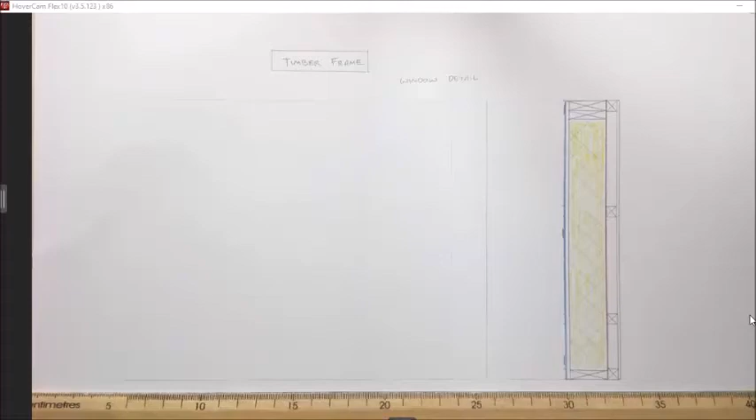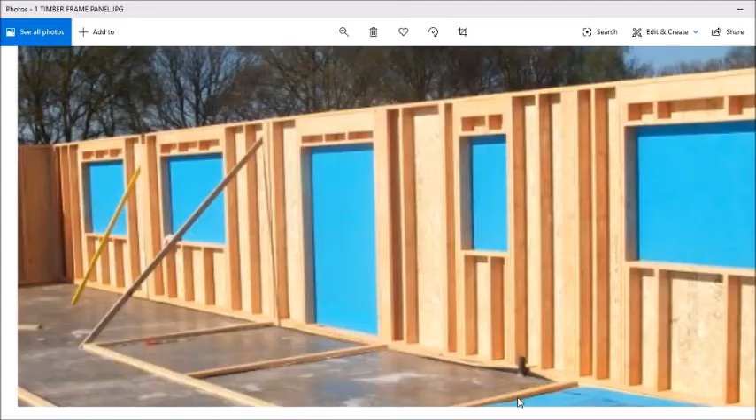Getting on to the window detail now. We need to chop an opening out of the timber frame panel. So we've got the basic outline of the timber frame panel here, again 200mm thick. The main thing you'll notice when you look at the timber frame panel is above either an opening for a door or a window, you have a section of solid timber, and it's the full width of the panel.

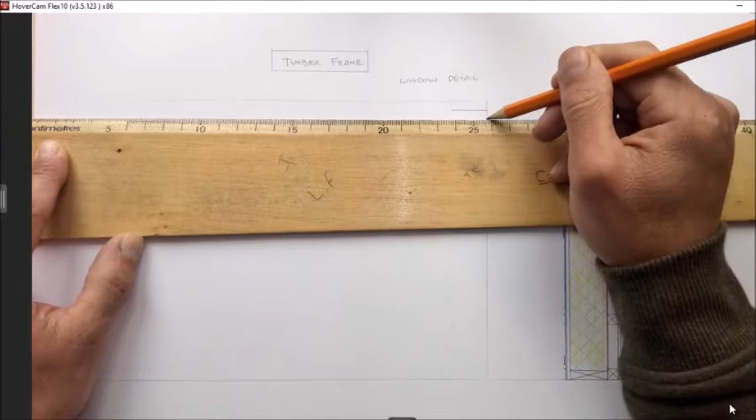To draw that in is very straightforward. We just need the same as we had before, our head plate. You can draw a double head plate if you want, and seeing as I've got it in the first drawing, I'll keep it. You don't have to have the double head plate. So that stays standard.

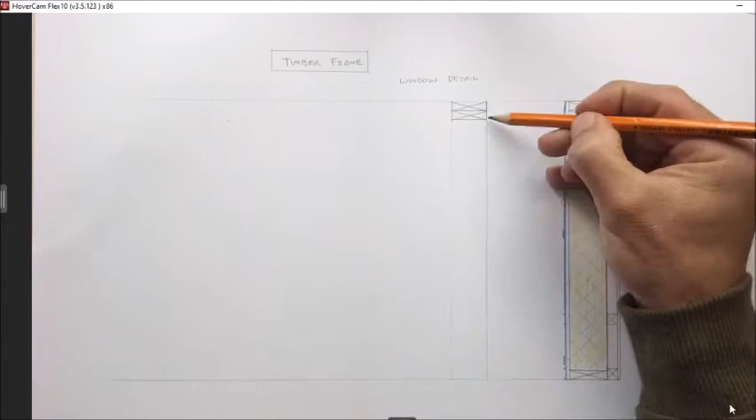Underneath that then we need our lintel. In timber frame, the panel is all timber. The lintel is going to be the same height as whatever you were told was this dimension here. So we were told at the start of this one, for example, I drew it in 200mm wide, meaning my lintel is going to be 200mm high. So that measurement is the same. If you were told that that panel was going to be 250mm wide, you'd make the lintel 250mm high.

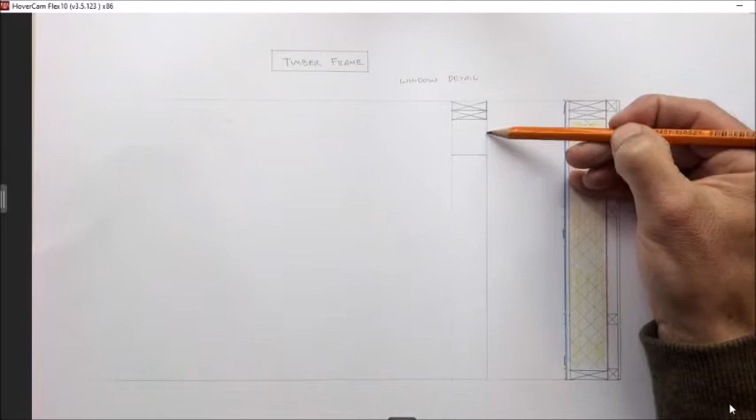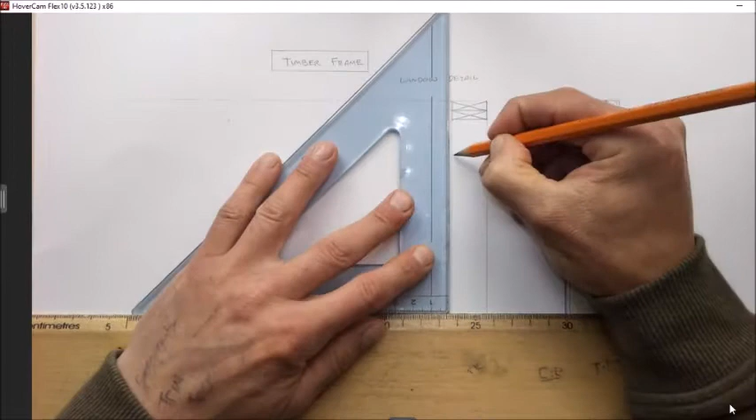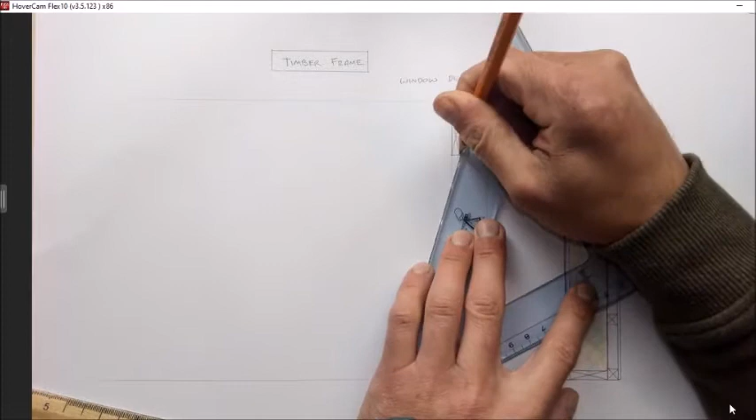All the timber is 50mm, meaning I have to make this out of 50mm pieces of timber. So it's going to be 50, 50, 50 and 50. So 4 pieces of timber are going to go into it to fill it up. And that is my timber lintel. And it can go in right under the head plate. You don't need a gap between the two. So I have my timber lintel drawn in.

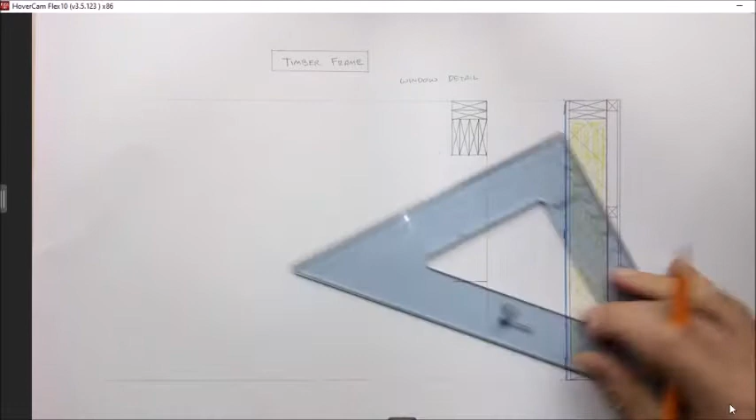The opening for the window, doesn't matter where we put it, we'll drop it in down here. It doesn't really take any weight, so it's just a single 50mm piece of timber. All the timber is the same size in any of the panels. So at the start of this drawing, I specified that all the timber was going to be 250 by 50. So don't move away from those measurements. Window opening is in.

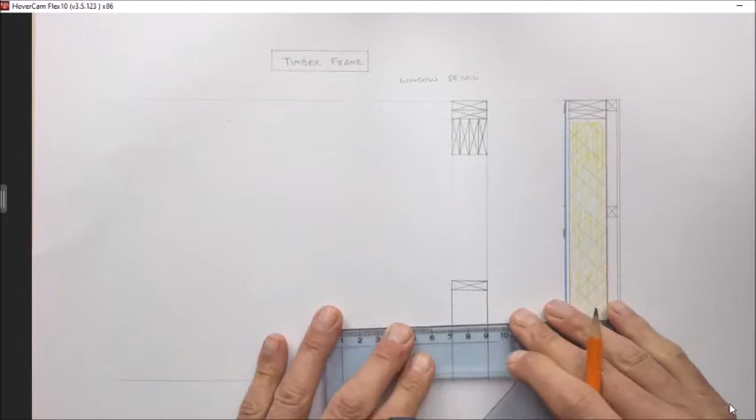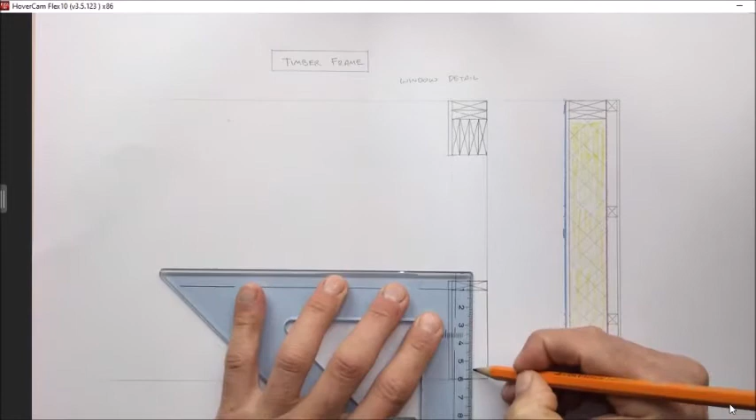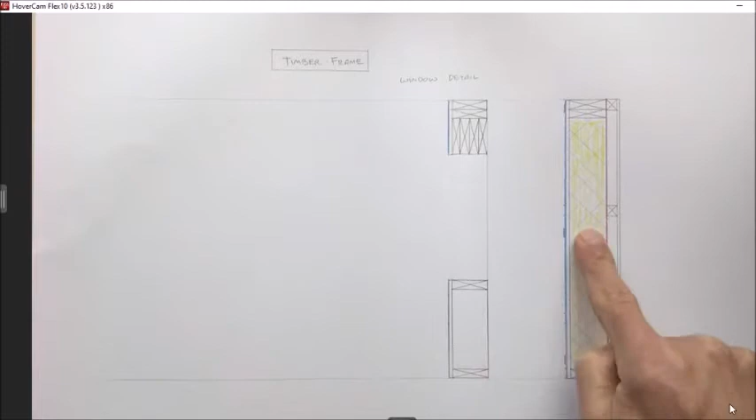And again, all the bits of the panel are the same. Plywood, 18mm thick. So the basic parts of the panel are the same. There's our plywood. Sorry, I forgot the sole plate. And our breather membrane. Blue for the breather membrane on the outside. So basically we just took the same panel from here and just chopped the window out of it.

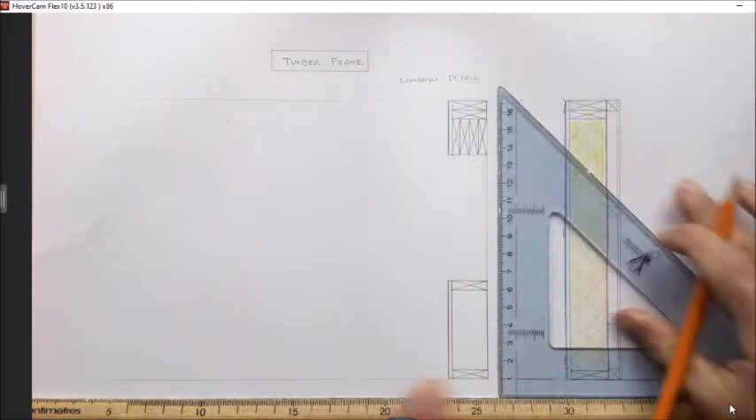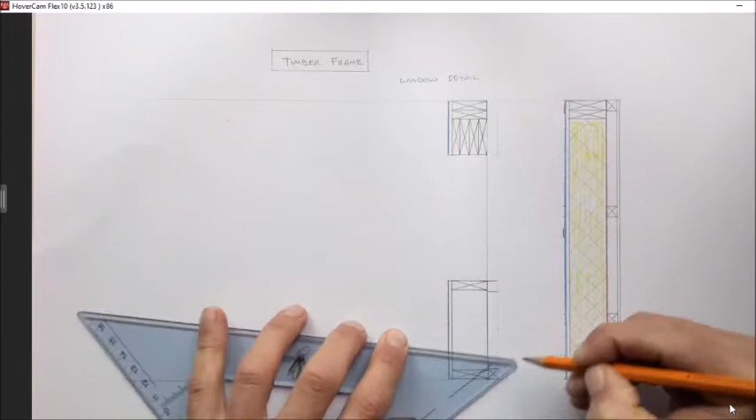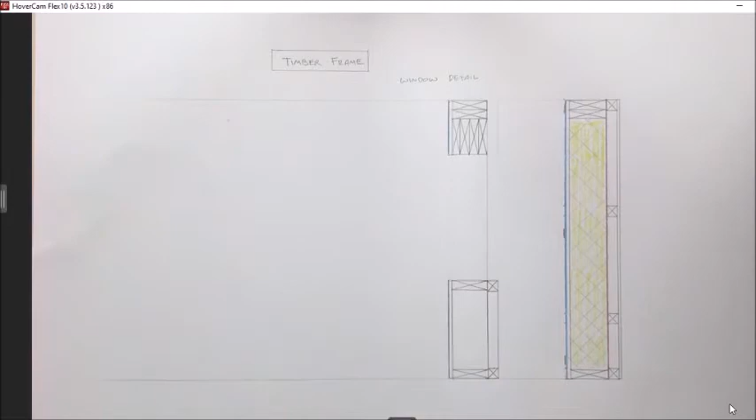Again, the airtight membrane, the service cavity and the plasterboard is the exact same. So the same thing, for example, a 60mm service cavity in 6mm. And I'll have a batten right at the bottom and right at the window opening. So 6 again, I said it'd be 6 by 6. So that is the first part of the service cavity drawing. The top for the second part, and again 6 and 6.

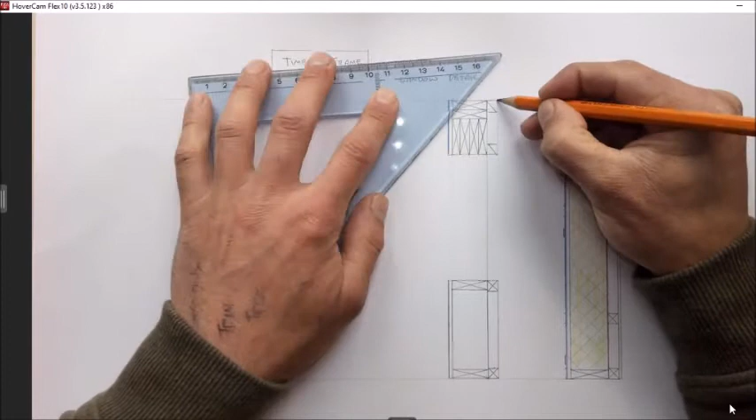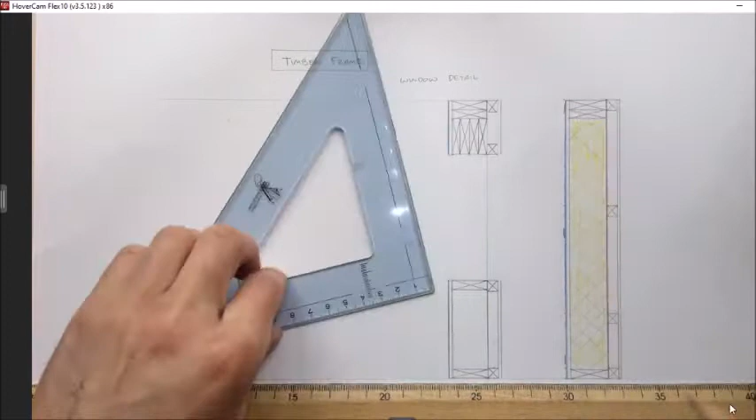And that is our service cavity created on the inside. 12mm plasterboard then as always. So we'll have our plasterboard coming up. And it'll turn in later on when we draw the actual window itself.

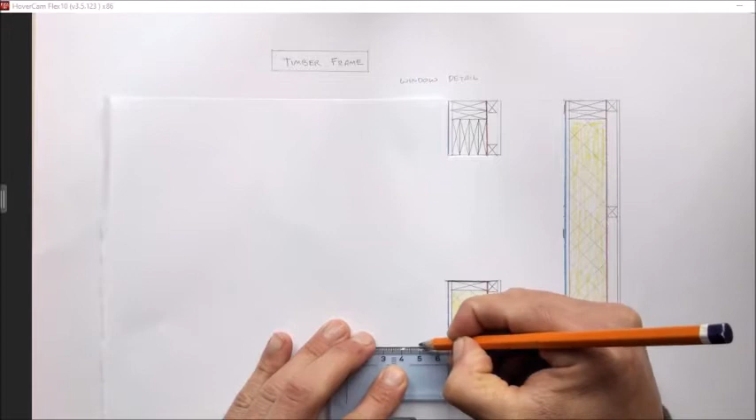For a block outer leaf then, same as before, it's very straightforward. 60mm cavity, and the block wall itself is 100mm. So lightly draw those in.

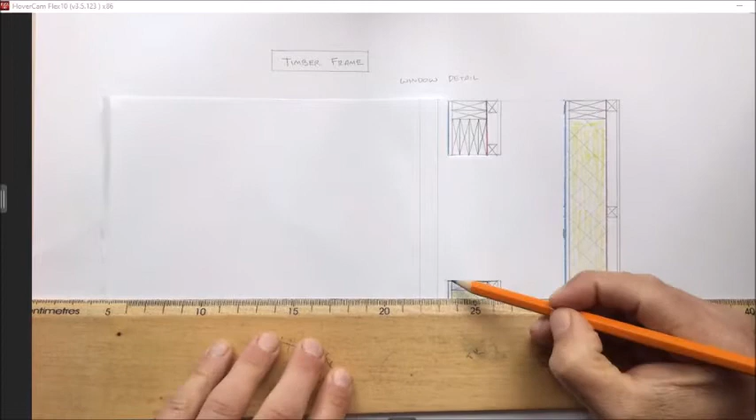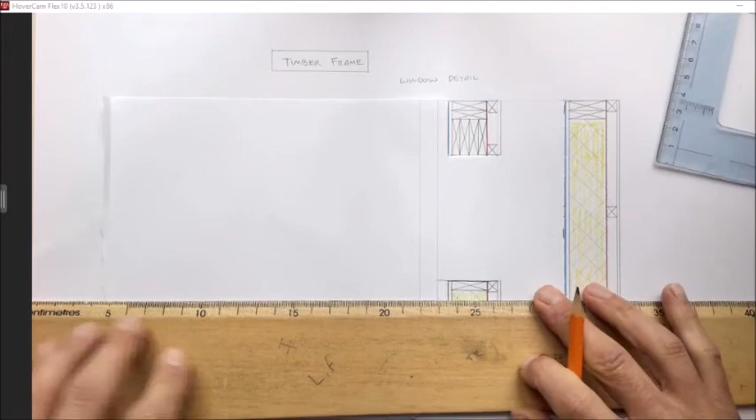Our windowsill has to be dropped in. So our sill needs to finish with the top of the timber frame section for the window. So when we come along, the only dimension you need is it's 100mm high, so 10cm high. So slight overhang out over the blockwork, drip groove so that no water passes back in underneath it. We'll have a slight angle.

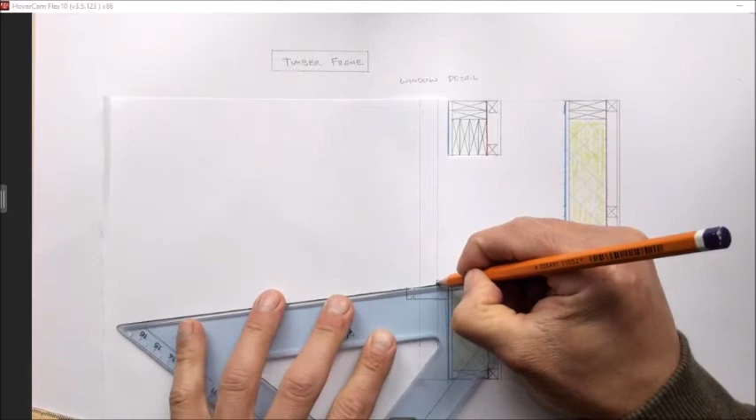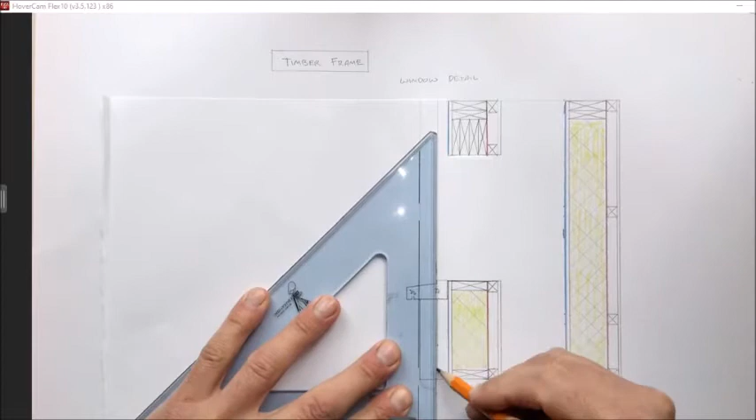Made with concrete, so show your labels for it. And there we have our sill put in. Blockwork down from there. As with the ordinary wall detail, you need your DPC. The DPC is wrapped up the back of the sill.

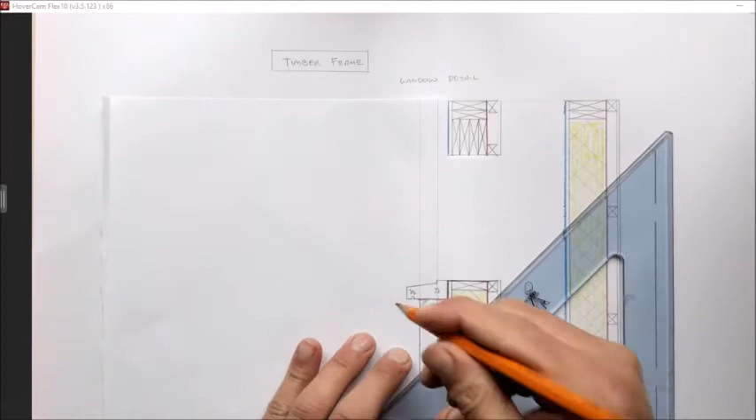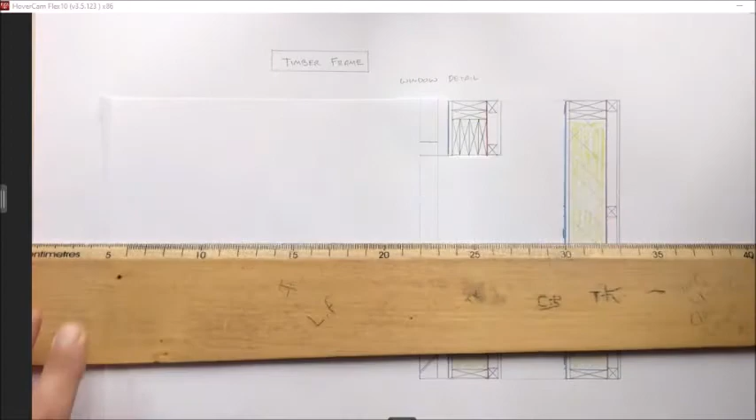So this detail I'm drawing is exactly the same for a block wall. So you're pretty much just copying the outer leaf of a block wall for this drawing. Same up top then, we need a concrete lintel. Lintel always 75mm, 7.5 on the drawing. And our blockwork will continue up from there.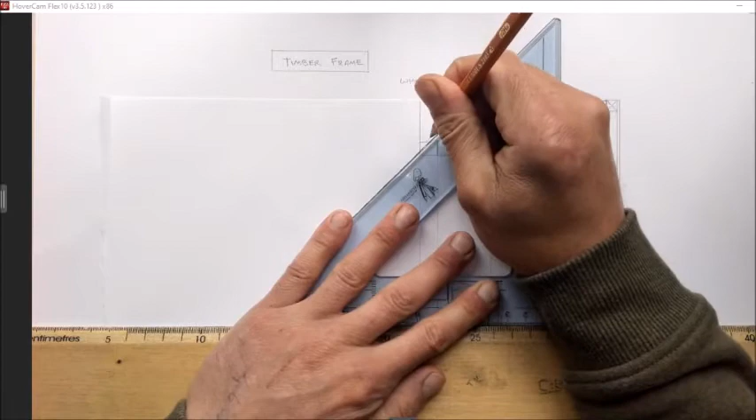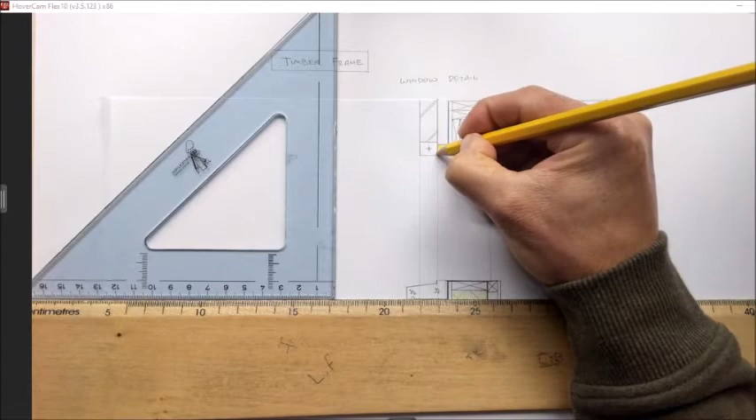Steel in the lintel, and as always we need a cavity closer. Cavity closer, no dimensions for it. Drawn in, and it's always filled with insulation. Cavity closer underneath the sill as well. And again filled with insulation.

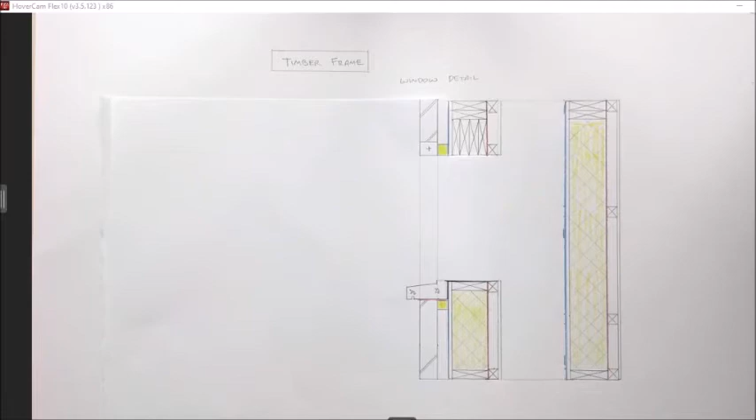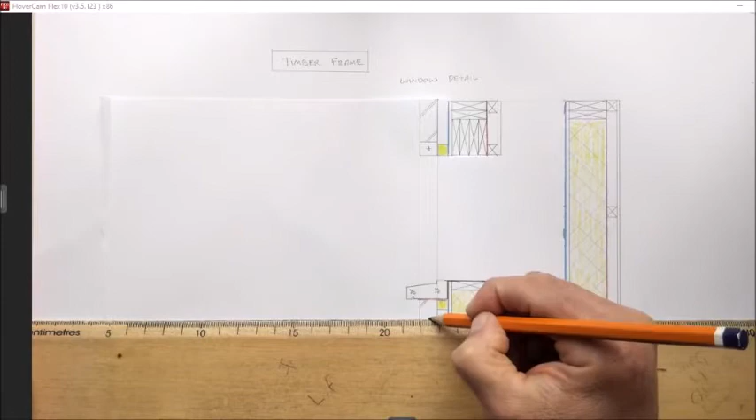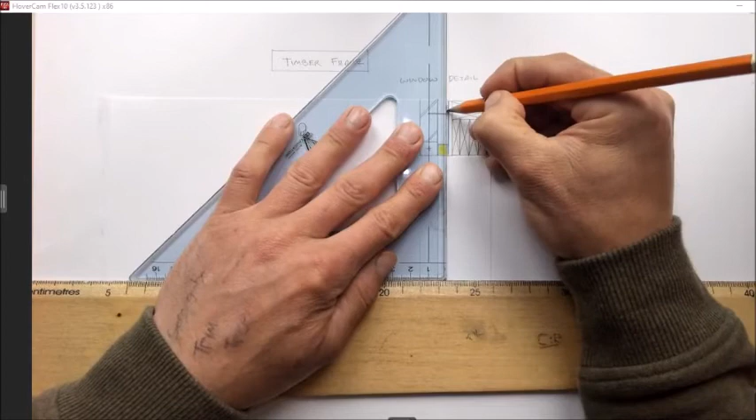We need our wall ties, so you'll draw in a couple of wall ties as we did before. And again turned up onto the timber frame. It's built into the blockwork and screwed onto the timber frame. So one up top, same. And again, in keeping with our standard block outer leaf, we have a step DPC.

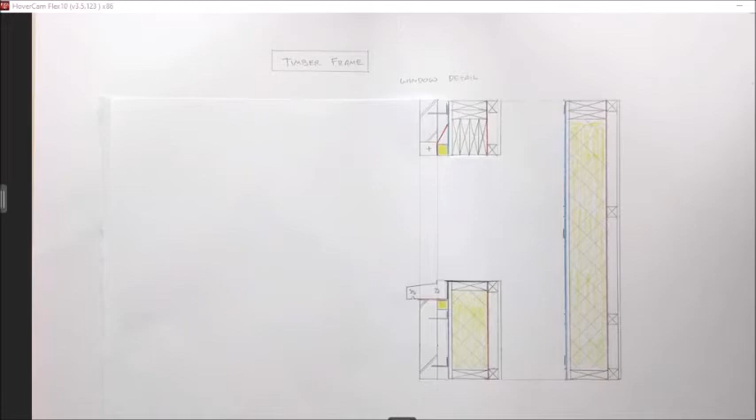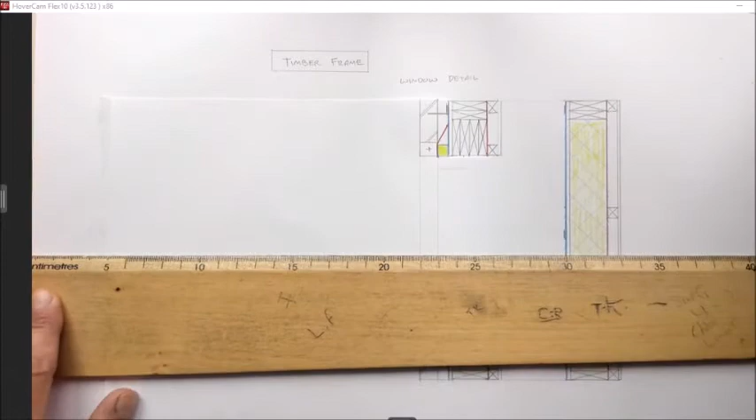The window, they'll normally specify a size for it. If they say it's a timber frame window, triple glazed, maybe with 150 by 75mm frame, what that means is from the inner part of the lintel, it'll be 150mm wide, 75 high. So you start off with a little box that size. We always start at the top and we work down to the bottom of the window. So that's the start off of the frame.

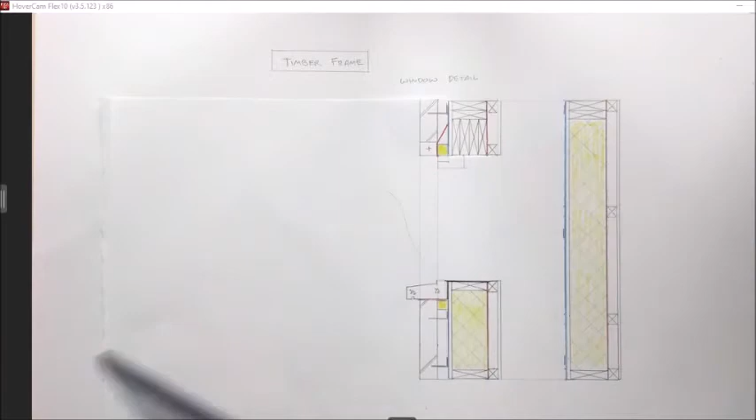I need to cut the sash out of it. Sash is usually about 60 millimeters. So in other words, we just measure in 6. It doesn't matter what height you come up there to cut it out. And there's no dimensions for the size of the sash, so the frame of the window. So I'm drawing in the frame of the window. And I'll draw in the triple glazing coming down.

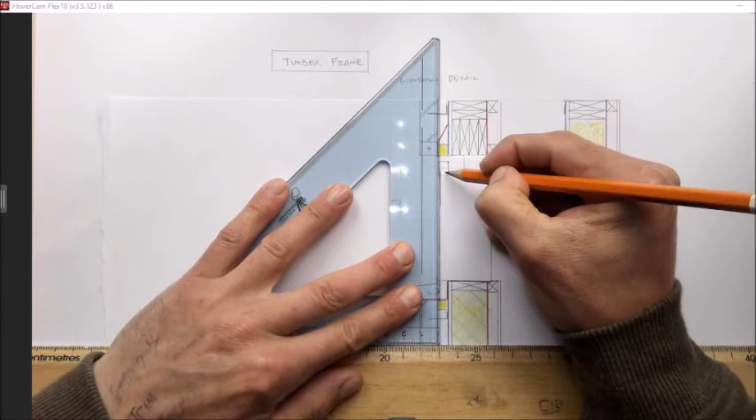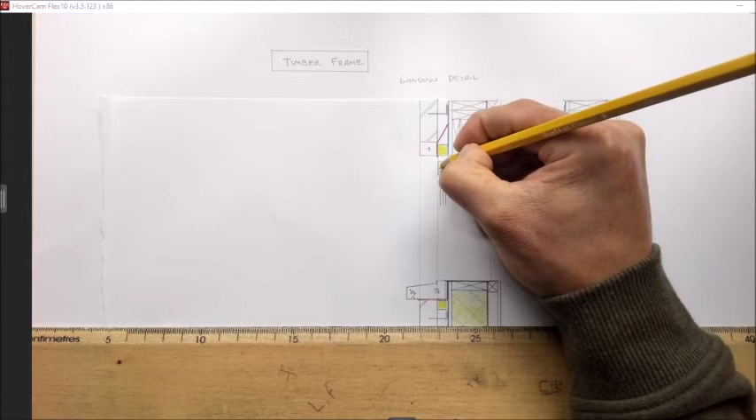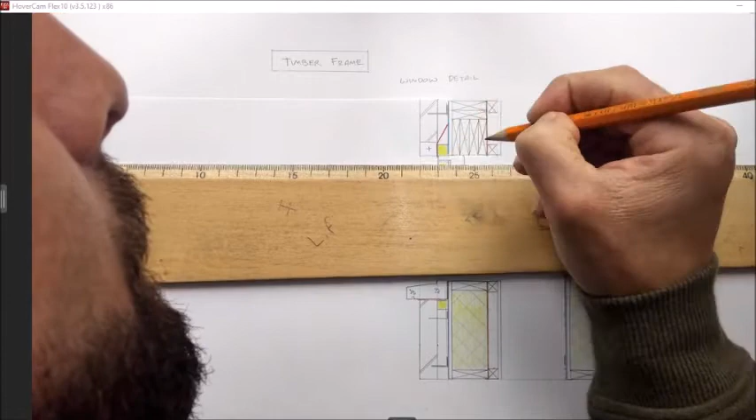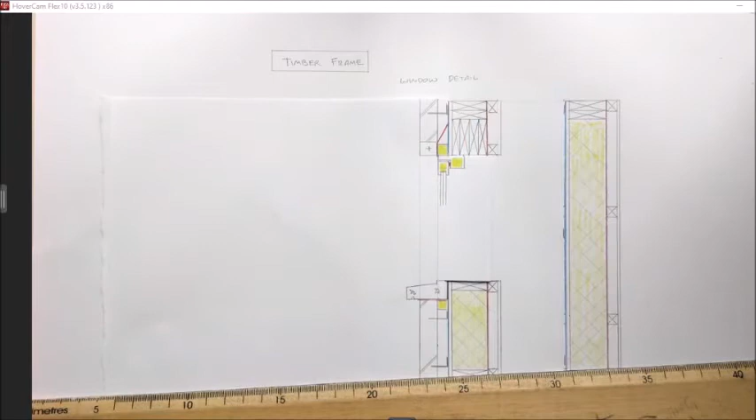Windows drawn in. If they say it's insulated, you draw some yellow in to show it's an insulated frame. And that'll be standard. To finish out the frame of the window, you just darken it in. Airtight seal needed to stop any air loss, and again it'll be an insulated frame, so you draw some insulation in on the frame. And we've got an insulated frame. Take that down to the bottom.

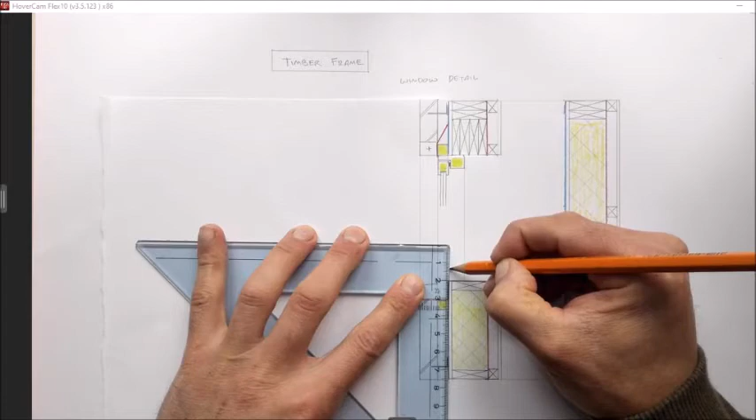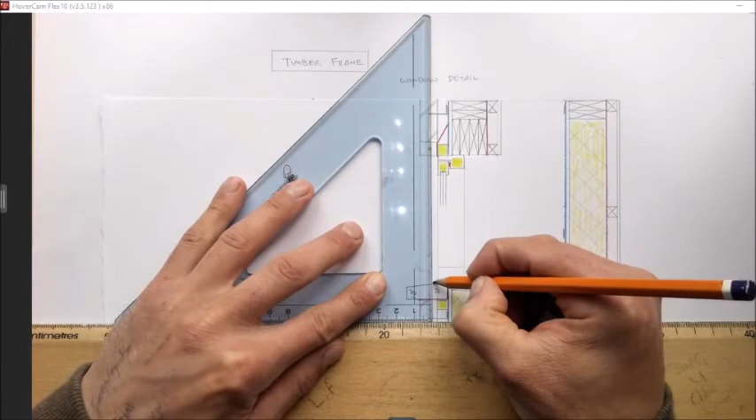And we need a slight overhang over the actual windowsill itself. Again, the frame at the bottom is 150 by 75, so up 7.5. And we draw on the basic outline. It needs to overhang slightly down here. So slight overhang. Just build it out. And our frame needs to drop down into that.

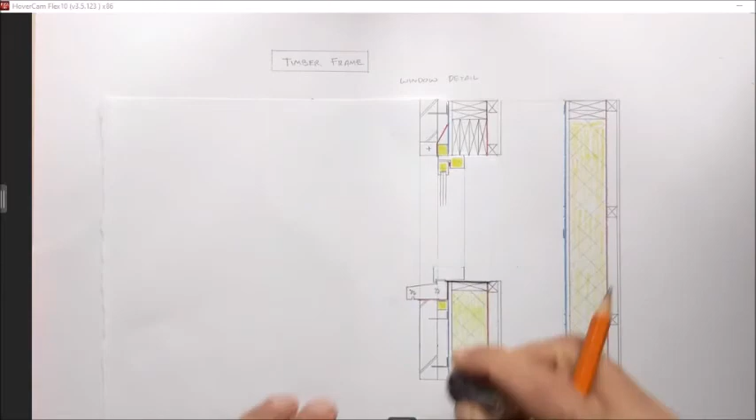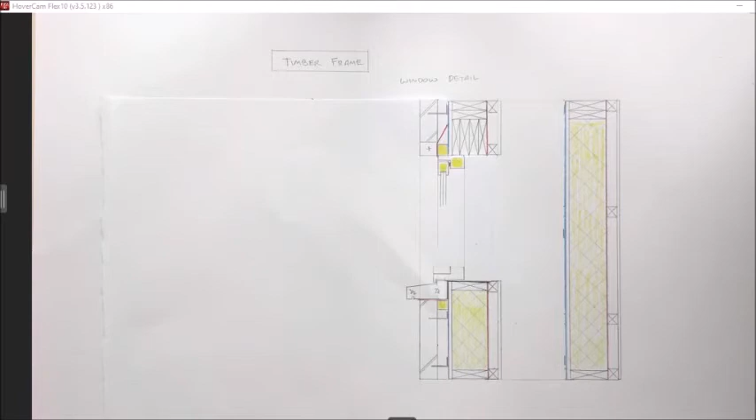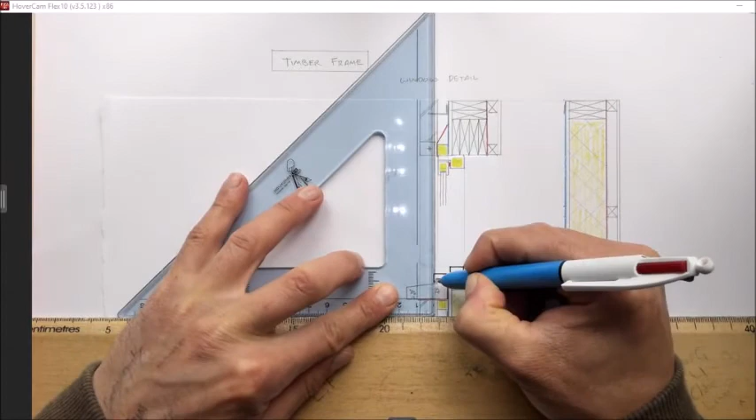So the frame comes down from above, and I chop the frame for the opening. So the piece taken out of the frame. I'll darken those two frames in so you can see them. So you're starting off with just a basic box, 150 by 75. That's the bottom portion of the frame, and again the same thing, it needs to have insulation in it. There's our insulated frame. I'll darken the one on top as well so you can see it clearly.